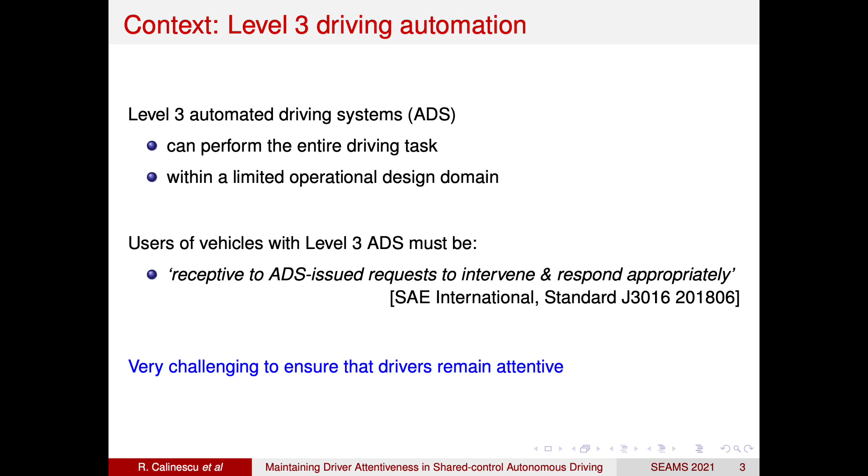Because these cars cannot drive autonomously under all conditions, they must have a human user located in the driver's seat, receptive to requests to intervene from the automated driving system and able to respond to such requests by taking over the control of the driving task. However, ensuring that the human driver remains attentive after potentially long periods of fully autonomous driving is very challenging.

According to a recently adopted United Nations regulation, the responsibility for addressing this challenge resides with the automated driving system. The regulation states that this system has to detect if the driver is attentive and to provide warnings such as optical and acoustic alerts if the driver is unavailable. If the driver remains inattentive for 15 seconds, the system is required to initiate a demand for transitioning the control from the autonomous car to the human driver.

Finally, if this demand is ignored by the driver, the system is meant to initiate a minimum risk maneuver, basically stopping the car in the lane in which it is traveling. The regulation is not prescriptive about the technical solution used to achieve these requirements. Developing suitable solutions is left to car manufacturers and to researchers. Our project proposes a human-in-the-loop self-adaptive system for solving this problem.

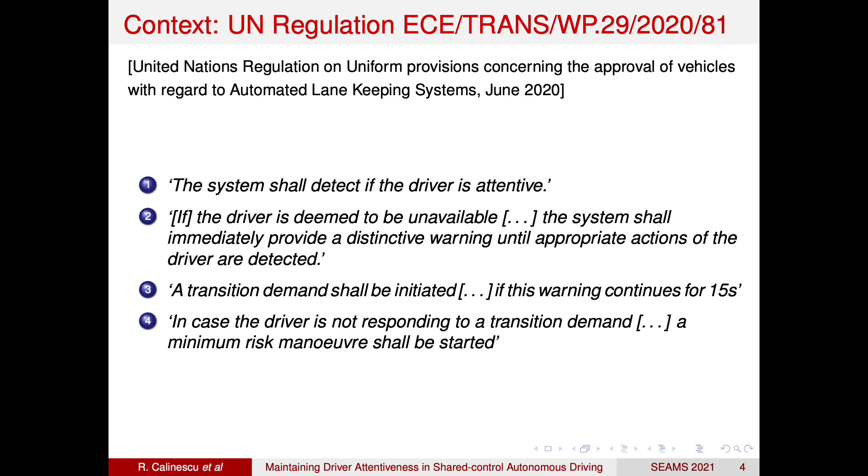In the second part of the presentation, I will describe this human-in-the-loop self-adaptive system. As shown in this diagram, our system uses a range of sensors to monitor the driver's biometrics and the status of the car. An analysis module based on a deep neural network uses this sensor data to determine the driver's attentiveness level. Green predicts that the driver is attentive, red means inattentive, and amber stands for an intermediate semi-attentive level.

Changes in the driver attentiveness levels activate a discrete event controller. This controller is responsible for switching on and off several types of alerts, optical, acoustic, haptic, and so on, and for adjusting the speed of the car.

The objective of the self-adaptive system is to achieve an optimal trade-off between three factors. First, we want to minimize the risks due to driver inattentiveness leading to minimal risk maneuvers by the car. Second, we want to minimize the driver nuisance caused by excessive use of the alerts. Finally, we want to maximize the progress with the journey by avoiding unnecessary speed reductions.

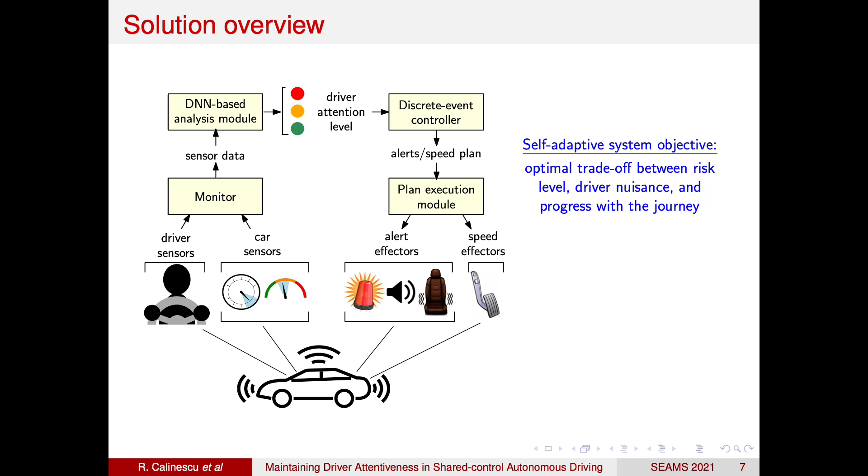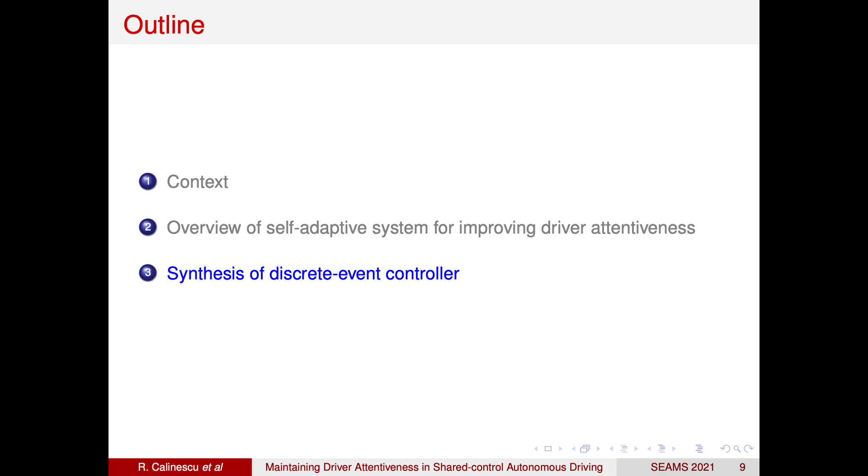In the last part of the presentation, I will describe the synthesis of the discrete event controller responsible for the decision making within our self-adaptive system. The controller synthesis comprises three steps. First, we model the design space of all controller options as a parametric continuous time Markov chain. The parameters of this model correspond to alternative controller options.

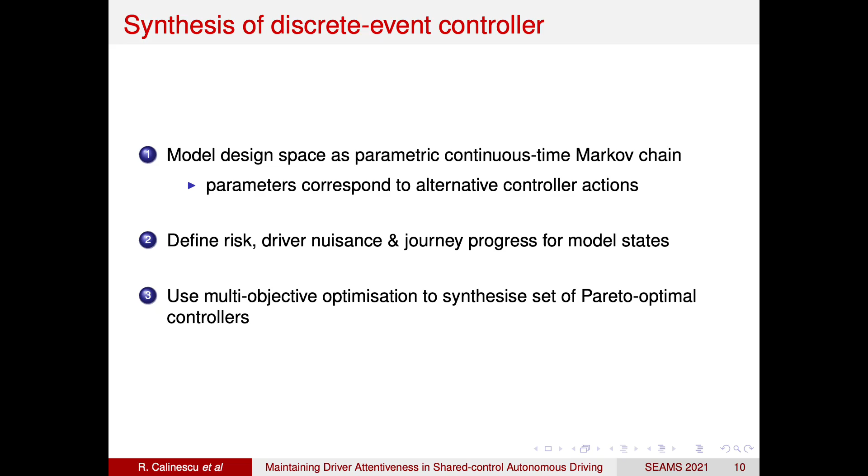Next, we quantify the risk, driver nuisance, and journey progress associated with different states of this model. Finally, we use a multi-objective optimization technique to synthesize a set of Pareto optimal controllers.

In the Markov chain used to model the controller design space, states correspond to different system configurations. In the initial state, the driver is attentive, the controller is inactive, all the alerts are switched off and the car travels at regular speed. Only transitions due to a change in driver attentiveness are possible from this state.

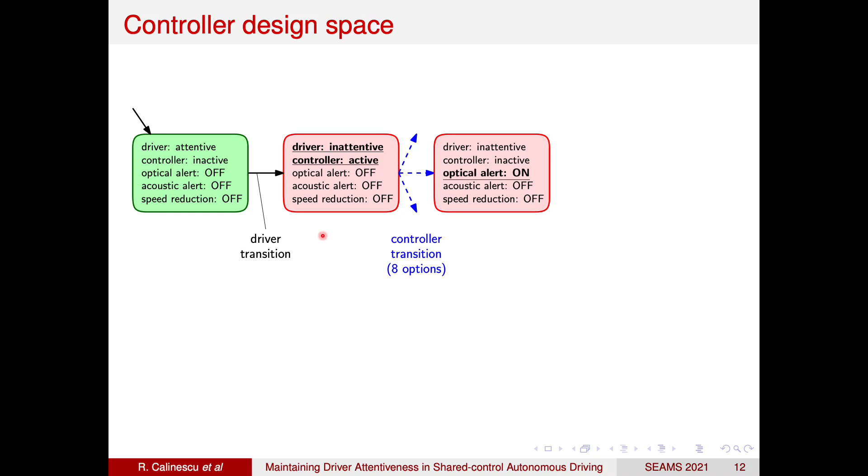For instance, the driver becoming inattentive is modeled by this transition to a state that captures the change in driver attentiveness level and in which the discrete event controller is activated. Once in this state, the controller has the option to activate any combination of alerts and to reduce the speed of the car. With the two types of alerts shown in this example, the controller has 8 options, including the

option to do nothing. As a reaction to the alerts switched on by the controller, the driver may become attentive again, in which case the controller will switch off all the alerts and the system returns to the initial state. If, however, the driver remains inattentive for a configurable period of time, we use a timer to reactivate the controller, giving it the opportunity to activate further alerts or to reduce the speed of the car.

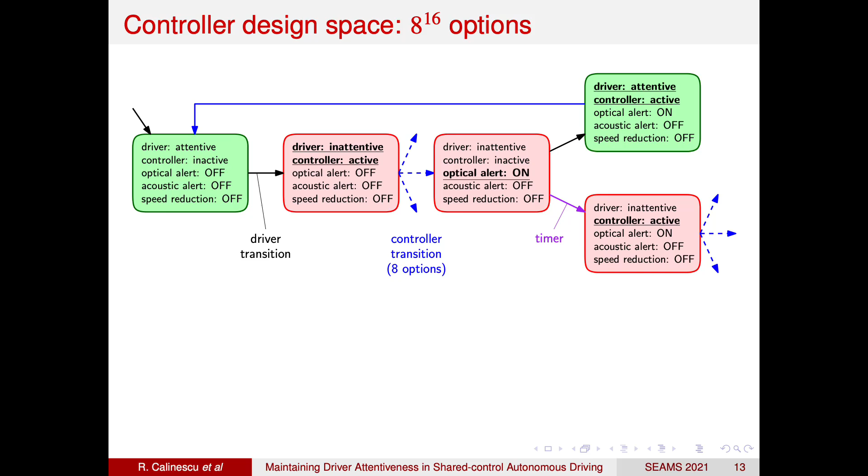There are 16 states in which the controller needs to act. These correspond to the driver being inattentive or semi-attentive and to the alerts and speed reduction being on or off. Given the 8 controller options in each of these states, the controller design space comprises 8 to the power of 16 different controllers. We synthesize suitable controllers based on the 3 conflicting requirements mentioned earlier. We want to minimize risk and driver nuisance and to maximize the progress with the journey.

To quantify the risk, driver nuisance, and journey progress for different controllers, we define the values of these properties for each of the system states. As an example, the driver nuisance will be 0 when all the alerts are off, will have some medium value if the optical alert is on, will have a high value if the acoustic alert is on, and a very high value if both alerts are on.

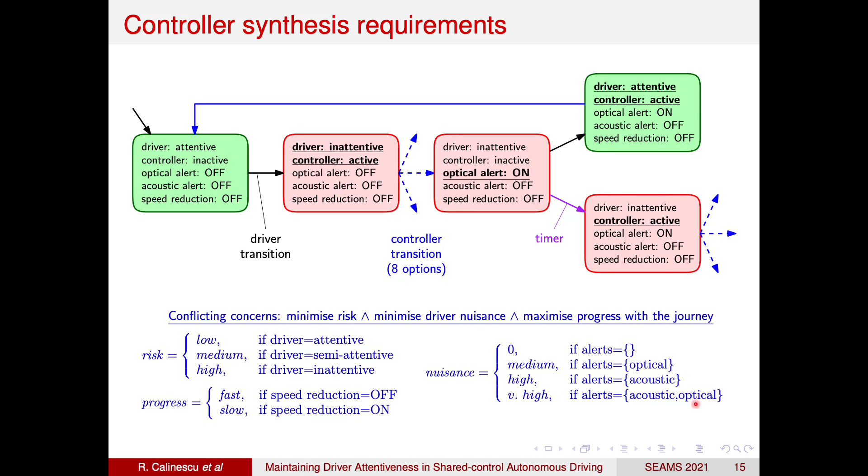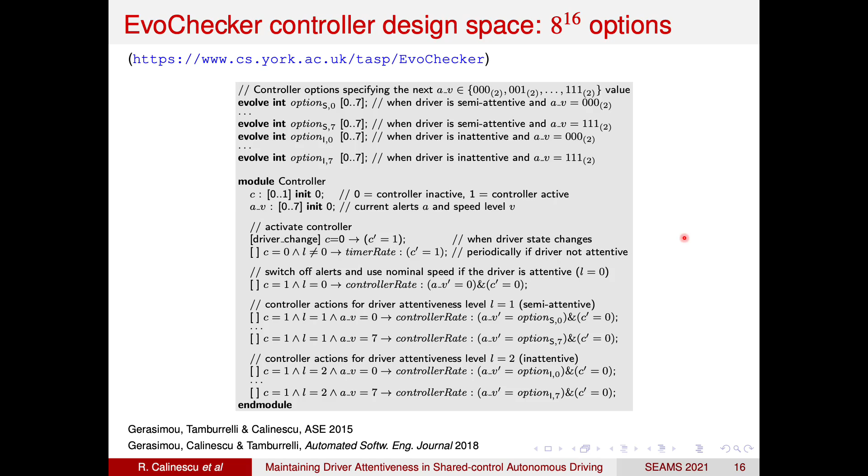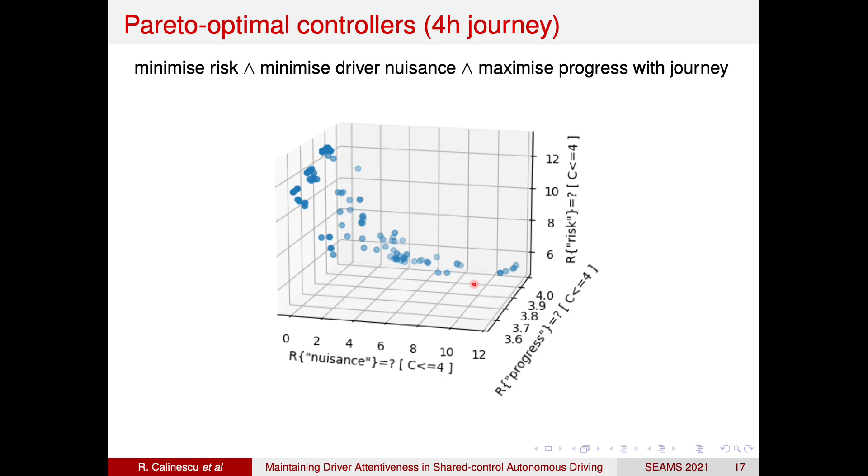The top left area of the plot contains low nuisance solutions. At the back there is the solution with the best progress with the journey, 4 hours of full speed travel, but this has the highest risk. Accepting occasional reductions in speed can lower the risk at the expense of covering slightly fewer than 4 hours of full speed travel within 4 hours of journey time. Similarly, allowing growing levels of driver nuisance can decrease the risk considerably, as can be observed in the right areas of the plot. This brings me to the end of the presentation.

Our research has delivered a work-in-progress solution to improving driver attentiveness in Level 3 autonomous cars through the use of a MAPE control loop. In this MAPE loop, we monitor the driver biometrics and the state of the car. We use a neural network to analyze the driver's attentiveness level. We plan driver alerts and speed changes using a discrete event controller, and we execute these plans using a range

of actuators. In the next steps of our project, we plan to use results from the verification of the neural network to calibrate its predictions, and we plan to improve the accuracy of the solution by synthesizing personalized, adaptive, and robust controllers.